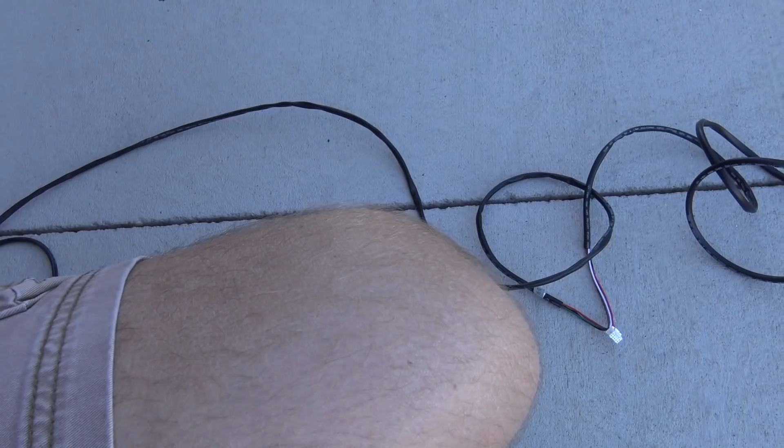I need to find that wire stuff first. The one thing I did with the oil, it might be in the car. The one thing I did with the True Boost was that I didn't like how the wiring was from AEM, it kind of splits, and it does it on the fuel pressure gauge too. On the True Boost it split like that, and I didn't like it, so I combined them into one tube because on the True Boost the wiring is a lot shorter.

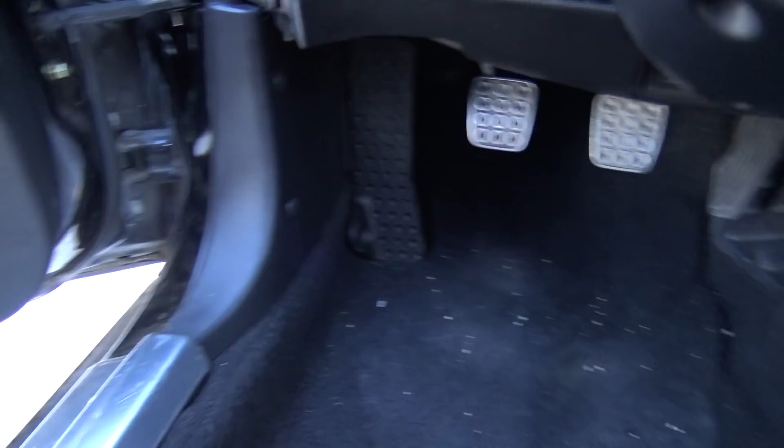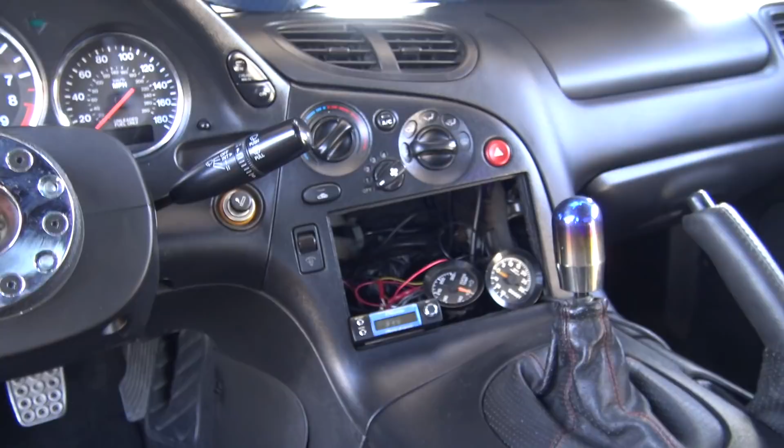Let me show you what I'm talking about. The fuel pressure I probably won't be able to do that with. I think we have all the wideband stuff up in here, but I won't be able to show it, it's all under there. What I have to do is pretty much pull that, well, I'll look under here.

I kind of want to run it with the engine harness, but I'm not exactly sure if that goes all the way under the HVAC box, so we'll see.

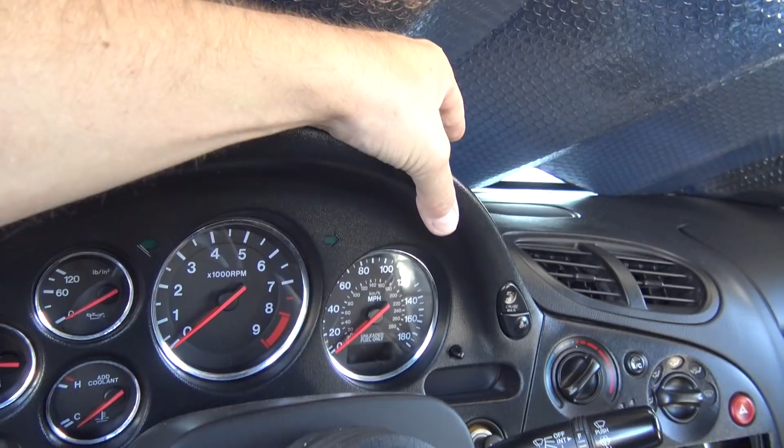And then, like I said before, I'm going to mount the gauges up there, and I guess I could put them down here for now, but I'll probably just stick them up there with some double-sided sticky tape for the time being.

I need to head over to the junkyard to get some parts for the FD. I can't even remember what I ordered, I know it's a few gaskets. I also just got rid of a clutch for a twin turbo 300ZX I had, because I have all this stuff sitting around. I'm trying to liquidate, and if I could get rid of most of the stuff I'd probably get rid of my semi-trailer. I don't know if I want to get rid of the shipping containers because they're watertight and mouse proof, but the semi-trailer kind of made me mad with the whole mouse situation. So I'm gonna head over to the junkyard and see if those gaskets came in.

All right, just leaving the junkyard. Got my gaskets, I guess I ordered the gasket for the housing for the water pump, and then a turbo return. Now I'm not exactly sure what I'm gonna do.

It's actually pretty late right now, it's dark out. I was messing around, hanging out with Trevor and helping him do some stuff. But it looks like I got some packages, so hopefully what I need to finish the FD is in these.

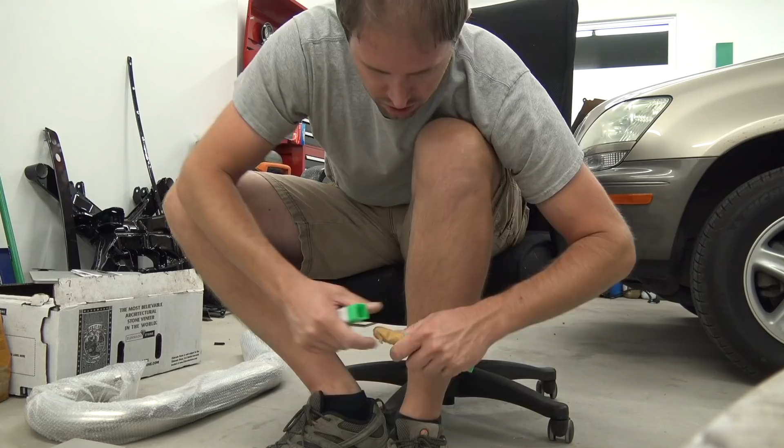Okay, so I got a few packages. I still haven't got the bolts for the intake manifold or exhaust manifold. I'll go over what I got.

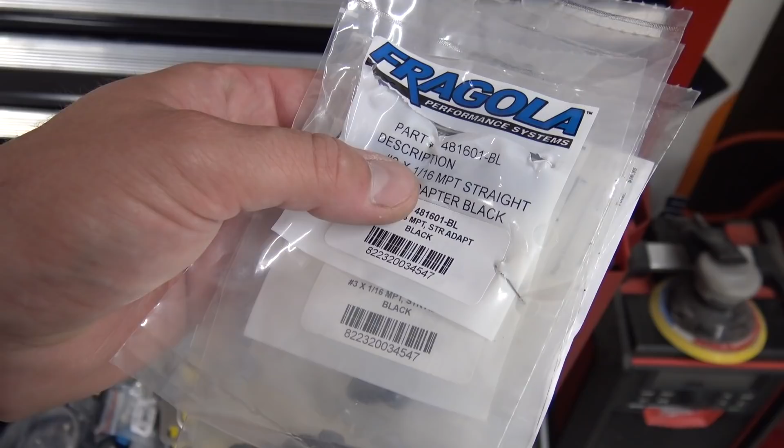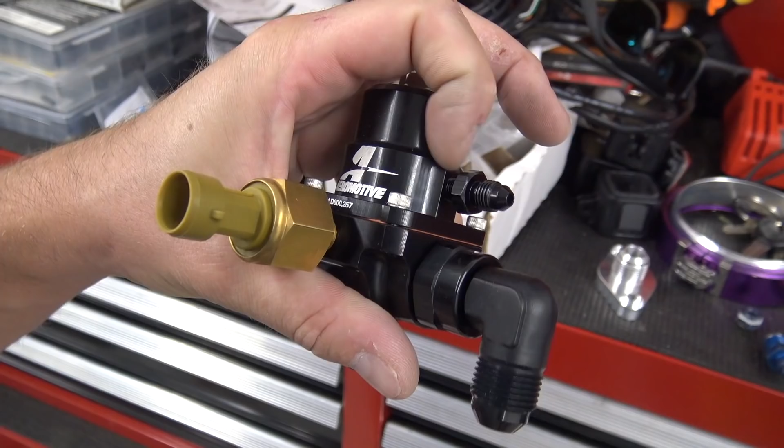So we'll start with the first thing, I put them in here. I got some of these 3An to 1/16 NPT fittings, and what those are for is so I could run hardline to the Aeromotive fuel pressure regulator. So that is 1/16 NPT.

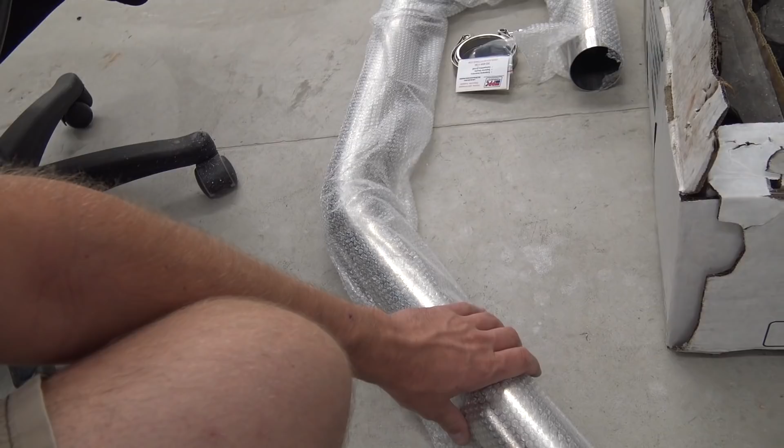Next, I got a piece of 3-inch stainless, well, polished stainless, as you can see right there, to make the downpipe for the FD. And I have some straight sections, so I should be able to complete the whole exhaust.

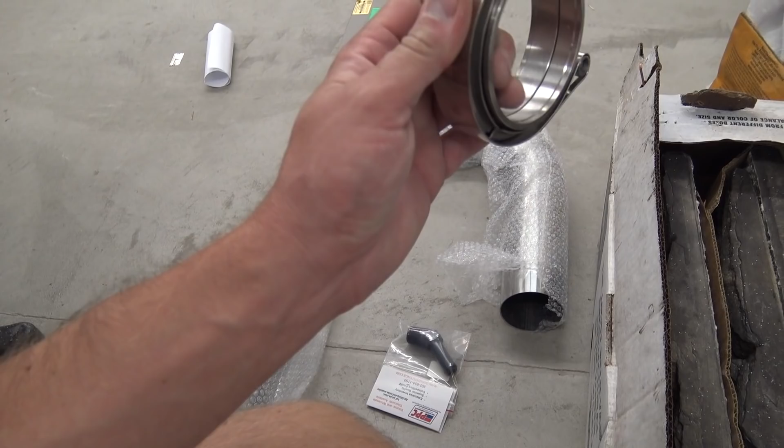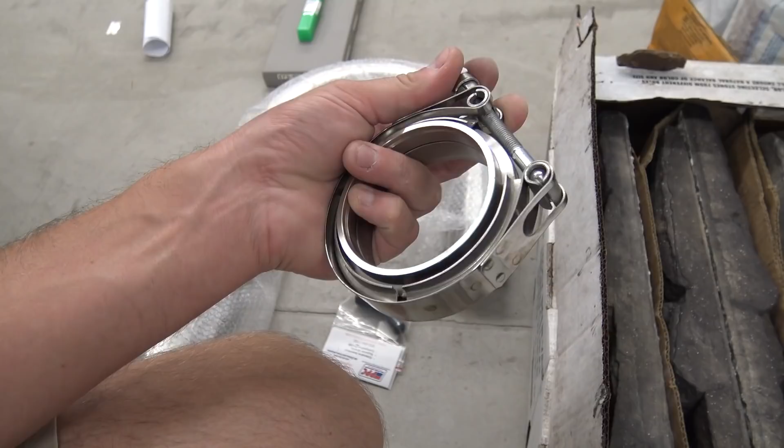I also have a V-band clamp, but this clamp is actually flanged, so I should be able to show you. You can see there's a lip in there and in there, and these are stainless as well, so they actually flange together.

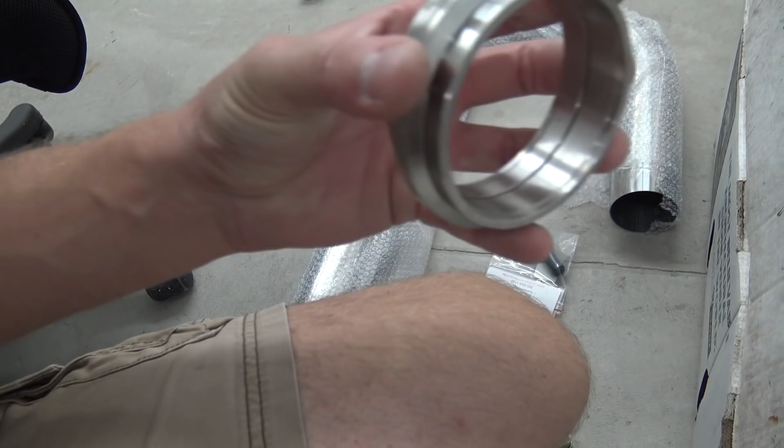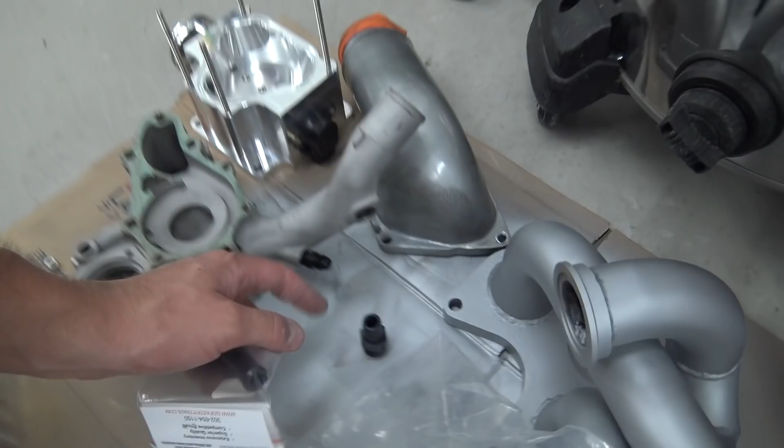And then I ordered this as well. I got this straight for here, but I also got this 45 just in case the straight doesn't work. So that's just in case, so I don't have to wait.

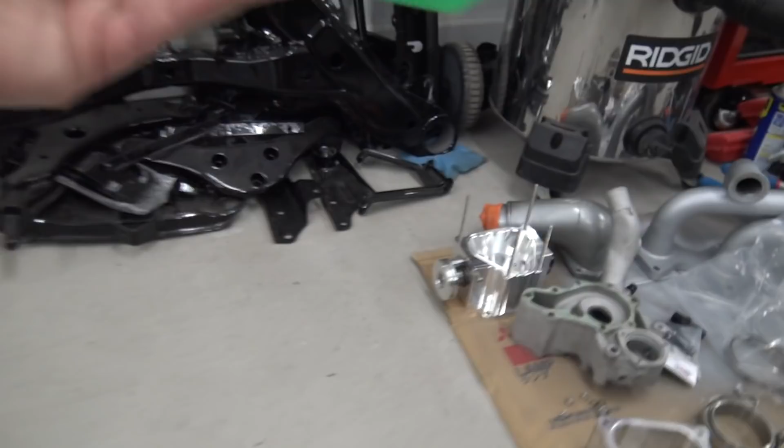And the last two things I got, I ordered this drill bit. It's a 45/64, and that's to drill this hole to 1/2 inch, so I could tap the 1/2 inch NPT in there. So I could do that tomorrow, and then I'll have that tapped.

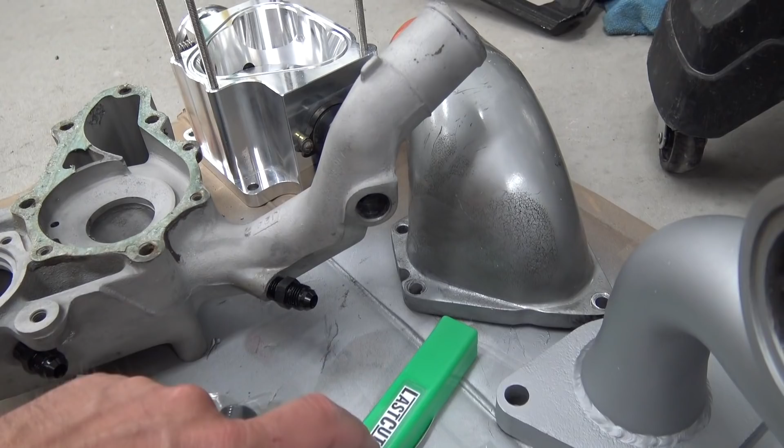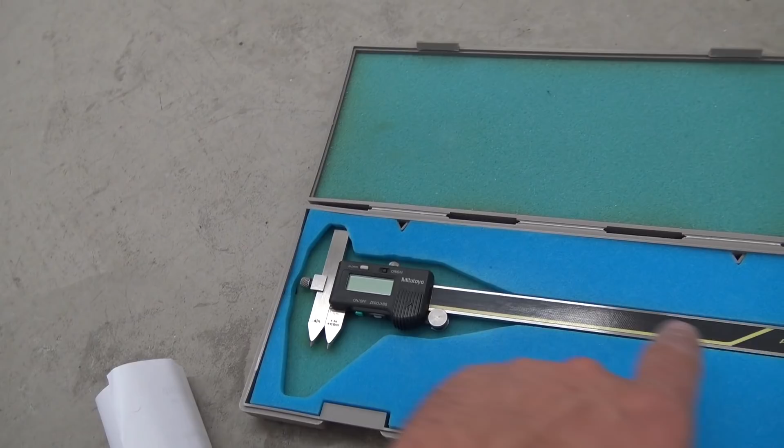And the last thing, I'm actually pretty excited, I found one of these for as cheap as I did. So this is a centerline caliper, and it measures hole centers. I can offset them here, and then I get exact hole measurements. So I'll show you how it works.

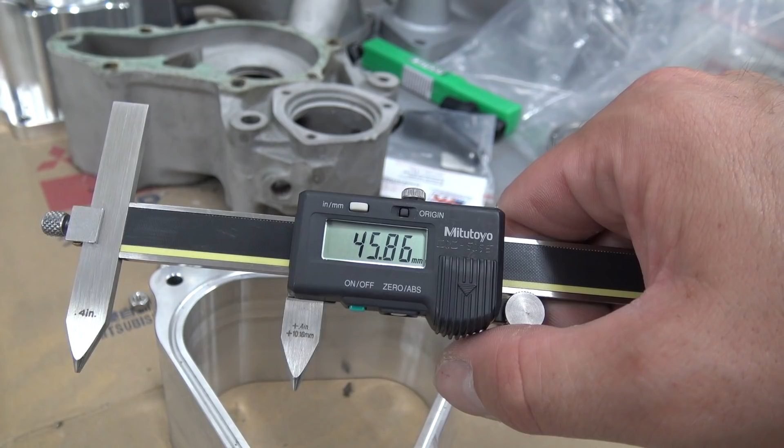So I'll turn it on. And if I wanted to get these two hole centers, I would just go like this. So it's 45.86 millimeters, and then you add on another 10.16 mils, and that's where the hole centers are. So it makes finding hole centers really easy.

And then I was in package opening mode, so I didn't even notice that wasn't mine, and it was delivered to the wrong address. So I opened it, but I'll seal it back up and put it back in the mail.

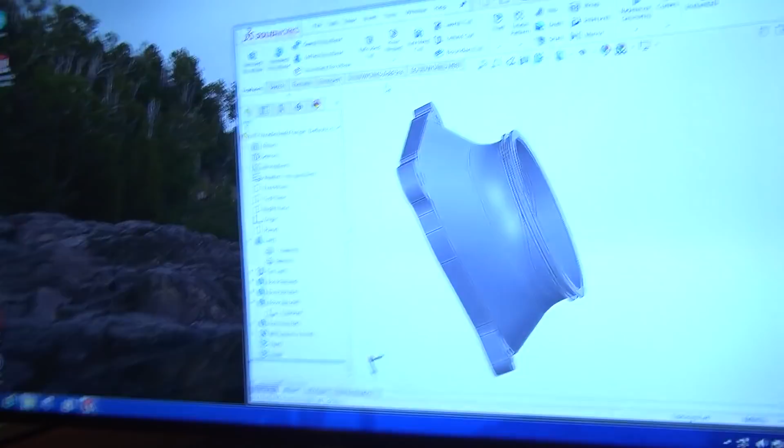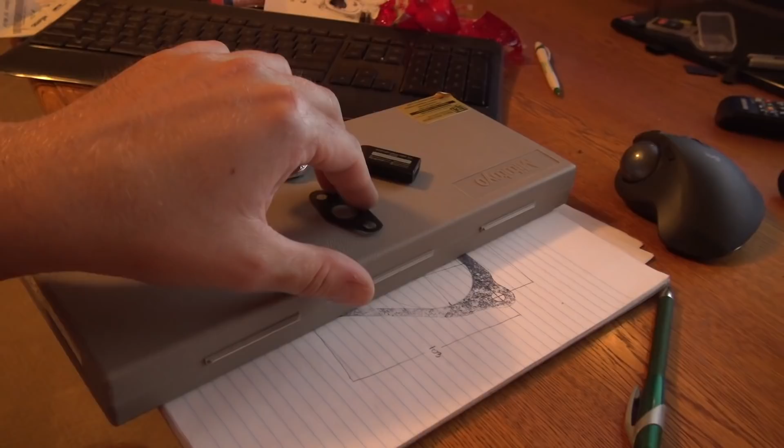A couple days ago, I designed this for the FD, and that was before I had this centerline caliper. So I want to design a return that goes to 12 AN or 10 AN.

So I wanted to adjust the 10 AN return on the 2J because the holes were a little off center, probably 1 millimeter. And then I wanted to make one for the FD. I got that gasket, so I just need to modify this one and make this one. So I'm going to do that in CAD.

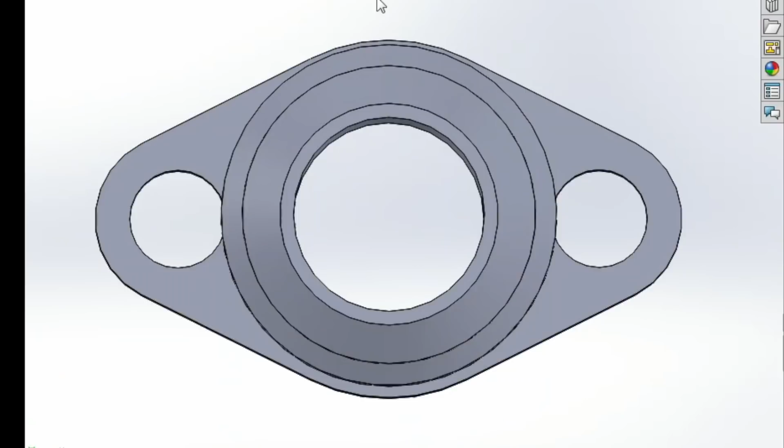Okay, so I finished the return for the FD. I also updated the one for the JZ. Yeah, it was off by a good 0.1 millimeter on each side, so 0.2 altogether, and that makes sense because it was kind of tight.

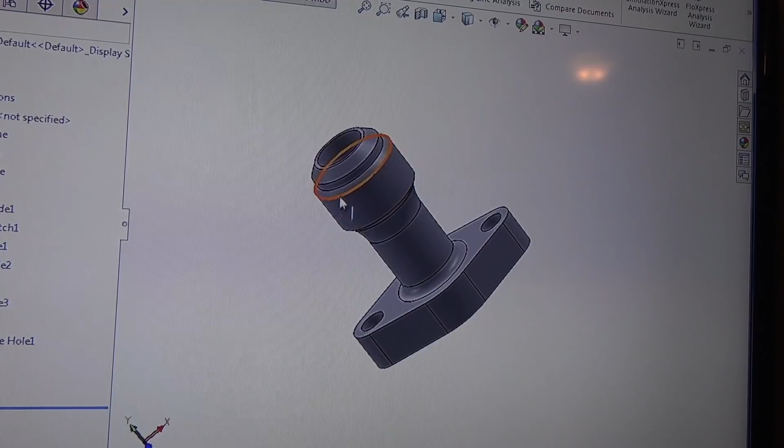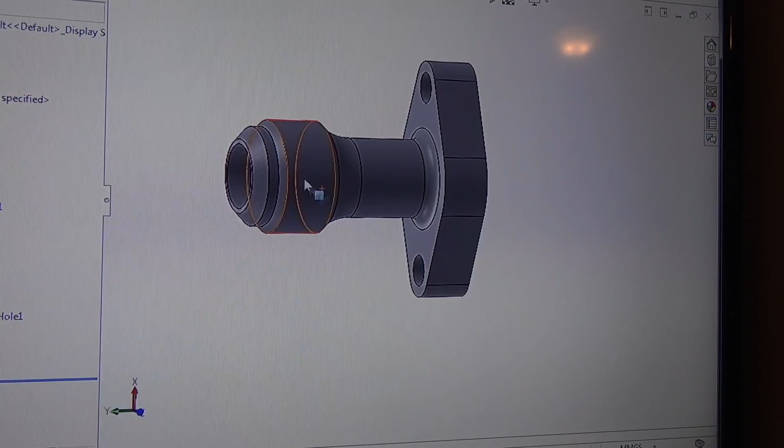So this is what I came up with for the FD, and this is a 10 AN thread right there, and it just goes to the 2-bolt and uses the factory gasket. So I shouldn't have any leaking issues, and I should have a nice, clean return from the turbocharger. Just a straight to like a 45 or a 90, and just bolt right on.

I'll probably end up having this made pretty soon and test it out. I'll probably 3D print it first because that's the best way to test things, make sure they're gonna fit.